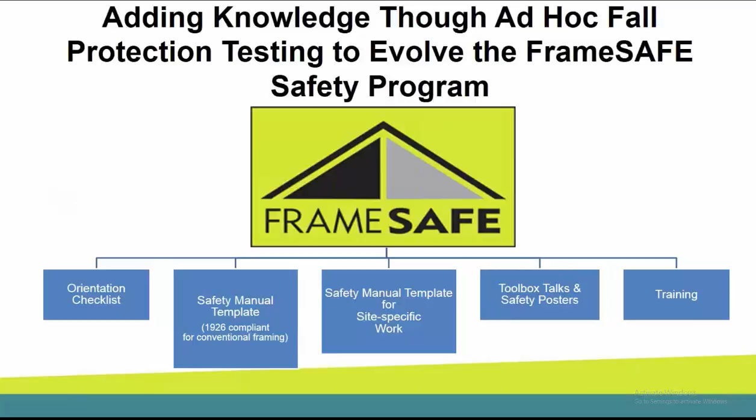Ultimately, we want all of the framers that are on the job site to be able to do their jobs safely, to have appropriate fall protection devices, and we can only really do that well if we have a good understanding of what it takes to resist loads, particularly during a fall.

As we got into this, we took a look at setting up an assembly of trusses, properly braced, and we ended up dropping a 250-pound weight through 6 feet. We conducted 4 tests of this type with different orientations of the weight in relationship to the assembly to determine exactly what kind of forces we were going to get through this kind of fall effect.

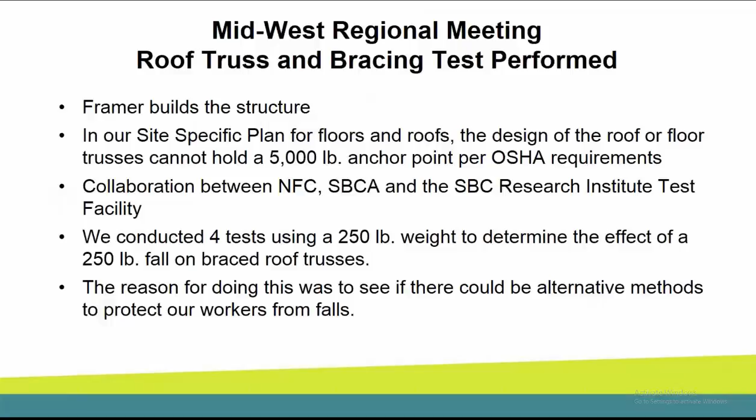Our ultimate goal, obviously, is to improve over time how we undertake attachment of trusses to fall protection devices and exactly the effect on trusses of a fall. The assembly looked like this. We set up 4 trusses, again braced to BCSI. We have lateral restraint and diagonal bracing.

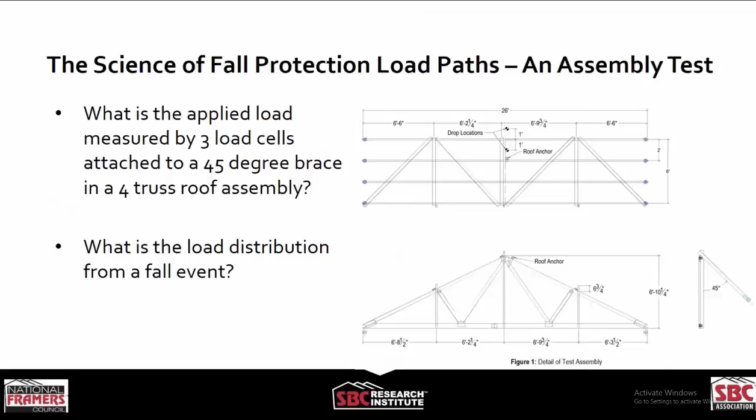We also have 45-degree braces on the back side of the assembly to monitor loads that flow into those diagonal braces as you load up the truss with a 250-pound weight falling through 6 feet. The trusses are also sitting on load cells, so all the gravity loads will be measured as well. The assembly looks like this. The blue devices are the load cells that each truss is sitting on.

And you can see the bracing, the lateral brace along the top and the diagonal braces on both the top chord and the bottom chord. And as a consequence of that, the bracing is holding the assembly stable. And then we've added load cells at the backside in the 45-degree angle members with load cells internal to those particular 2x4s so we can measure compression and tension loads accurately.

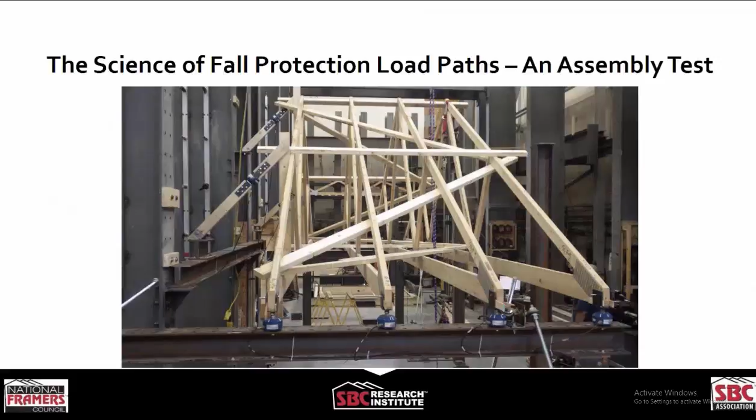You'll notice the load cells right in the center of that 2x4 cut into the 2x4. This is another example of that particular load cell. And so as we go through this process, we're going to use this information to understand, as we load a truss up with a fall, how does that load transfer through the assembly?

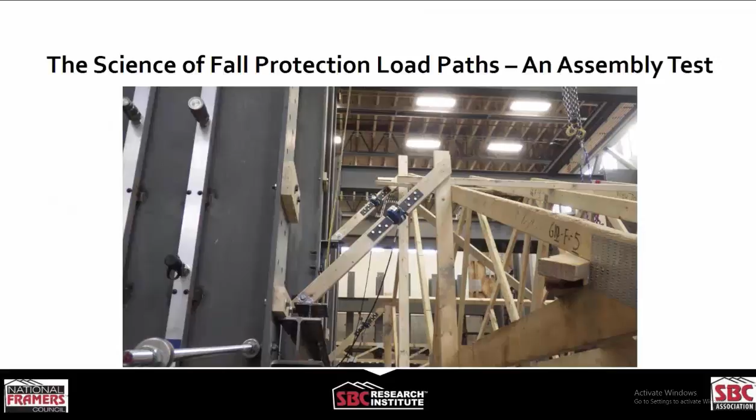Back in 2009, we ended up working with NIOSH to do some fall protection testing on a full roof truss assembly, similar to this, but not with all the load cell devices laterally that we have here today.

But the initial testing that we did, just to get a sense for how load cells perform when a drop occurs from a fall type activity, we dropped a 60-pound weight through about 3 to 4 feet. And we wanted to see exactly what that would do to the double top plate kind of 2x4 setup and 2 load cells. That looks like this.

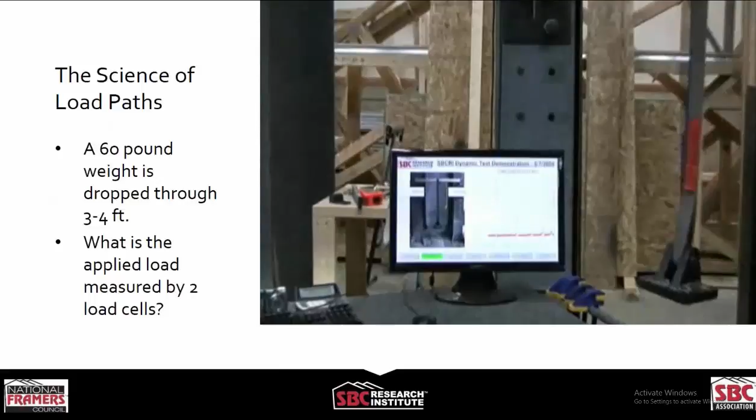There's a couple things you'll instantaneously notice. It's an impact load that happens very rapidly. The total load on the load cells is 2,112 pounds. Did not affect the 2x4 at all. You'll notice too that that decay rate happens very rapidly.

And as a consequence of that, the physics says that there's a very high load under an impact kind of condition, but the actual load is probably more in the 100 to 150 pound range from the fall itself. And that initial impact is not something you want to experience, but nevertheless, it's a very short duration type load.

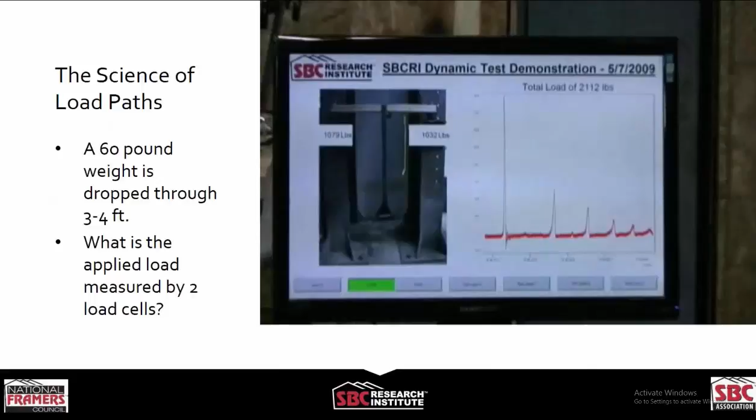And that should be able to be managed properly through fall protection devices like shock absorber lanyards and things like that. And that's proven to be the case, which we'll see in the next series of tests. Now this is the assembly test with the 4 trusses properly braced.

This drop is right straight down between the trusses where the lanyard is attached to the peak of the truss, and it's the second truss in from the back side. The total maximum tension force from this drop is 119 pounds. The maximum compression force is 101 pounds. So it looks something like this.

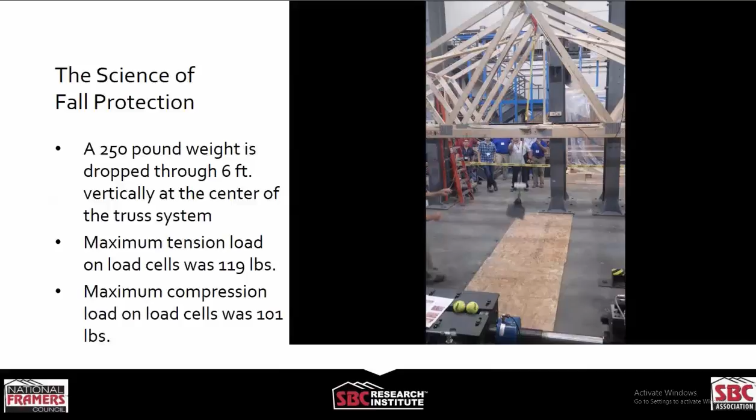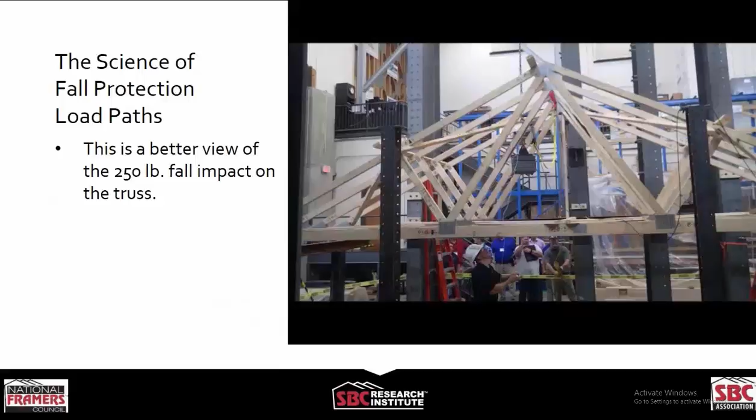Now we also have a better view of that with a wide angle, and that looks like this. And you'll notice that there are measurements taken to make sure that we've got the drop consistently the same in every situation. So this will give you a sense for kind of our first test in a broader way, and take a look at the motion in the truss as we undertake this test.

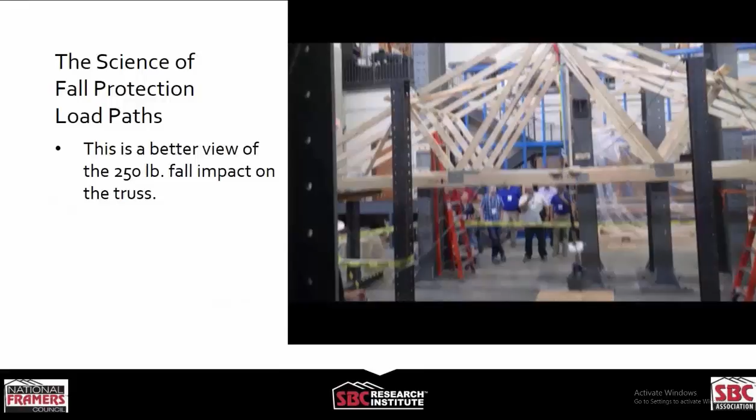You notice that there's not much motion there at all in the trusses itself. The trusses are stable. Obviously, it makes some sense that there's not much motion when the drop is straight down through the trusses. So given all of that, we changed the setup to now pull the load outside the truss assembly itself. I'll load up diagonally to that same connection, the second truss in at the peak.

And what is going to happen to the assembly in this particular case? Here the maximum tension force was 376 pounds and the maximum compression force was 166. And again, watch the assembly and watch the drop and watch the shock absorber, as everything really tells a nice story when you can see it live.

One thing you'll notice there is the trusses moved a little bit, but not very much in the scheme of things. So as we go through this process, we ended up having the group say, well, why don't we pull the lanyard over the top of all of the trusses, then drop the load, and the expectation of the group was that the load, because of the fulcrum effect, was going to be higher on the load cells behind and probably have a bigger impact on the trusses and maybe even break the trusses. And what you'll see here is a performance that was really quite interesting given the expectation.

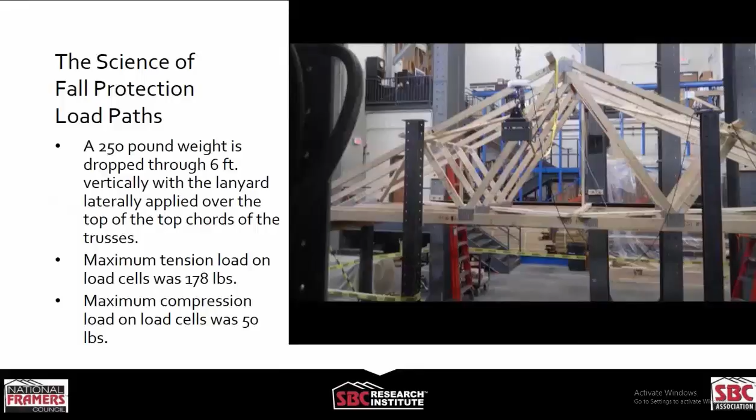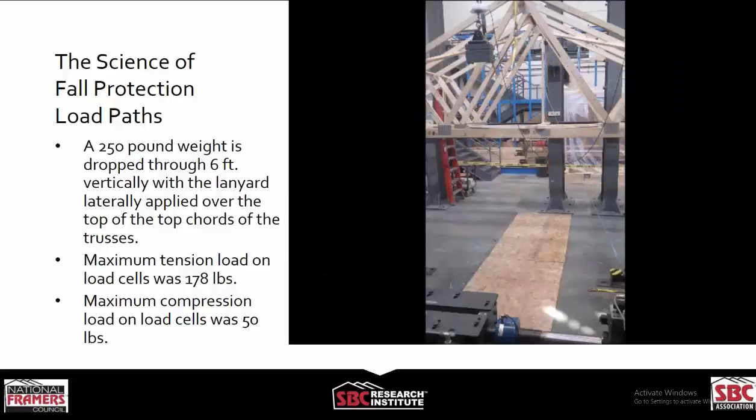Now you notice that the two examples, or the two views of that particular fall, showed that the lanyard and the shock absorber extended much further. So there was much more of a force at the corner of the truss, but there's also greater load distribution. And actually the max tension load was reduced by about half.

And so from that vantage point, it's pretty clear that this particular drop, given the forces in the corner and how much the lanyard extended from the shock absorption point of view, the truss assembly obviously distributed the loads from the fall across multiple fasteners, reducing the load to the backside load cells, and the load distribution changed dramatically.

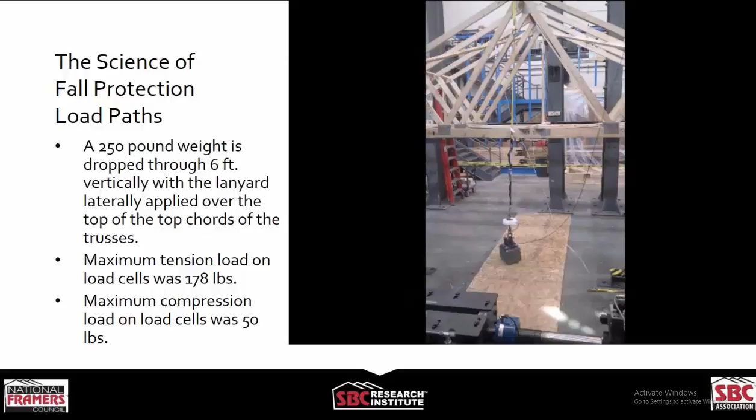So then we said, let's take the bracing off the bottom chord, so you'll see the diagonal braces are not on the bottom chord any longer, and do the drop again at the diagonal, which is the worst case load condition, and see what happens here.

The issue that we expected to potentially run into is the 6-foot fall could potentially cause the bottom chord to at least move, but potentially break, as the fall and the lanyard hits the bottom chord on the leading edge without the diagonal bracing. But you will see the effect of diagonal bracing.

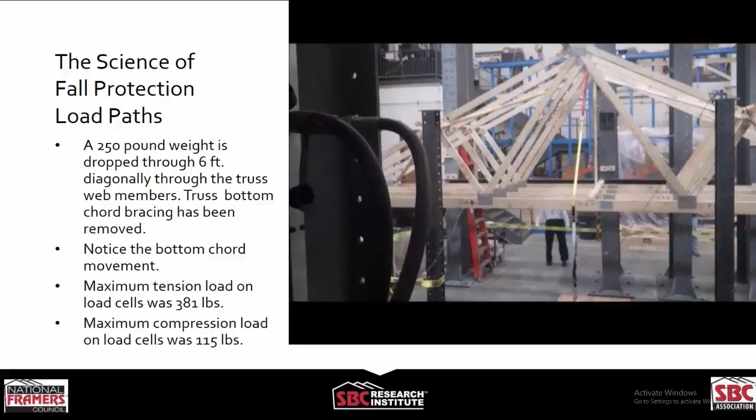So did you notice the bottom chord move pretty dramatically? We'll do that again just to take a look at it one more time, because it does show the movement of the bottom chord without the diagonal bracing, but it does not break the bottom chord. The load was about the same, 381 pounds, so I think we had 376 pounds previously in tension. So not much change there, just a little bit more movement.

So the point of all this is that a properly braced system obviously holds load. Now this is not a 60-foot set of trusses, it's a 30-foot set of trusses, but nevertheless, it begins to provide us with some insights we wouldn't otherwise have.

And our goal with all of this is, obviously, if we can get more data and apply the data to engineering models, we can begin to design fall protection that's both safe and allows the structure to be put up efficiently, because we can design fall protection into an efficient application of trusses.

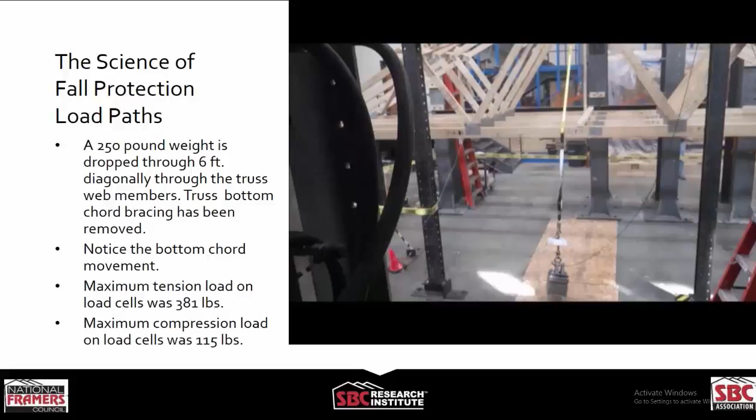So we have done quite a bit of testing in the past. A couple of assemblies that we've used to undertake load path tests look like this. You can see that this assembly is on load cells. We can measure all the load throughout this entire assembly. On the back side of that particular assembly is a girder truss.

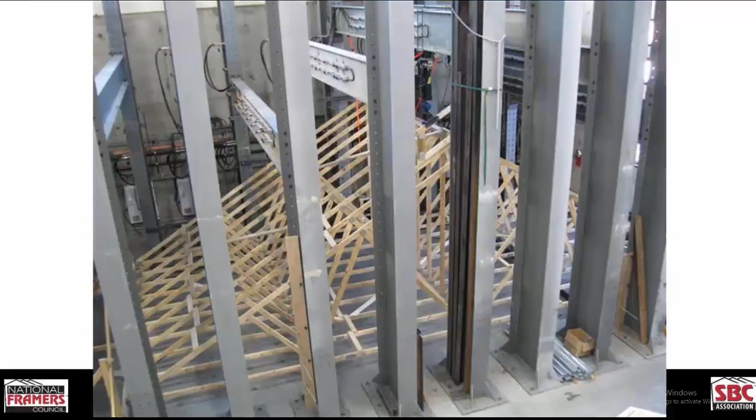And we did use this particular assembly with NIOSH in 2009 for some preliminary tests as well, and some preliminary modeling. This is another view of the same truss assembly. You can see the actuator right in the center of that assembly. We're applying loads there to understand load path through this assembly.

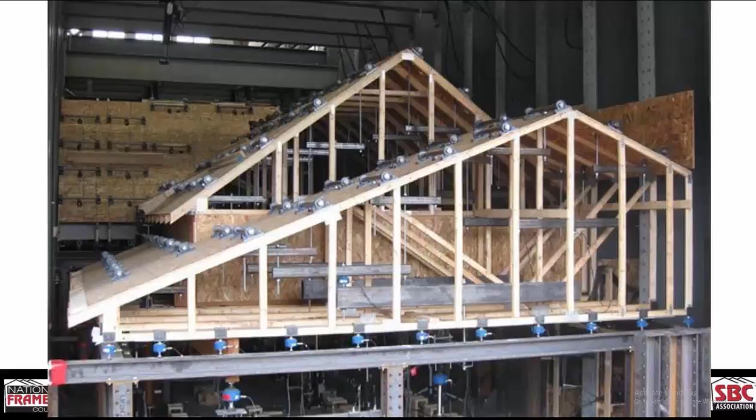And finally, we actually installed a hip roof system and loaded this particular assembly up to about 140,000 pounds and broke it. And we repaired those trusses and broke it again just to see the load distribution. But you notice we have load cells throughout this particular assembly. We've got load cells in web members.

At the lower end of this particular assembly is a glulam beam right here, and that's on a fairly large load cell. So we're understanding load distribution throughout an entire roof system that's a fairly complicated roof system. So we can take all this information, put it into a SAP 2000 three-dimensional model, and actually see load paths.

Well, what does this mean for the Framers Council and framing in general? We believe that if we can get information like this, and we've got engineering models that are fairly sophisticated, we can begin to optimize the safety on a job site by modeling the installation of trusses, modeling the fall protection, and making the entire process efficient and safe.

Obviously, the only constraint on all of this is having the resources to do so, but ultimately, with the framers being engaged in these kinds of activities, we need to take their common sense that they use every day to build structures, and we need to begin to wrap engineering around that common sense.